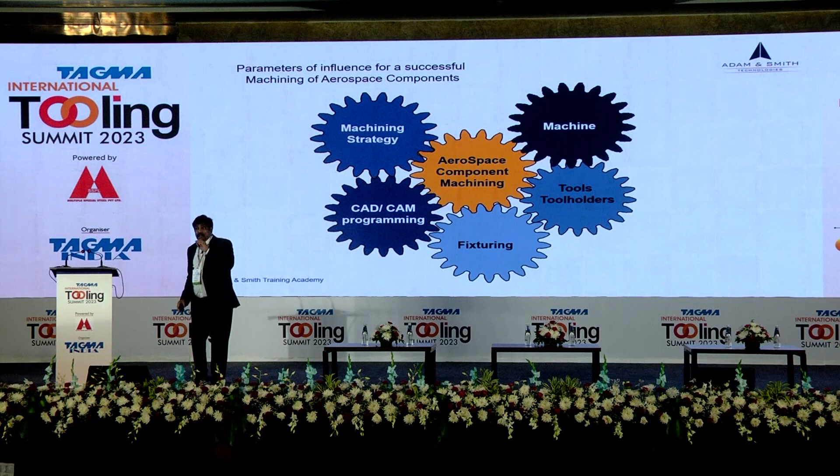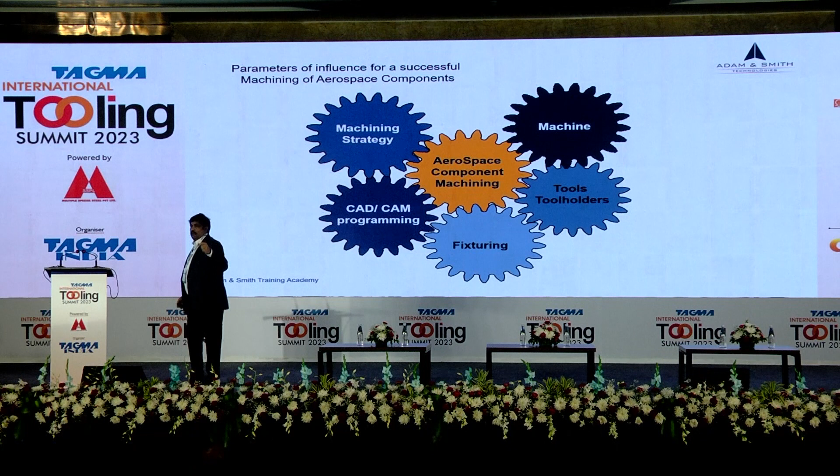They love machining, they love the job - only then is it achievable. It's not just for a monthly salary, finish and run away, no. Every engineer in this country, for the next 10 years, who is involved in machining has to take the bus, as we say in India. We have to work at it, find out the solution until we reach the expected result.

So how do we overcome this? Oh madam, 5 or 50 minutes? Okay, I told this person before calling me, when I start this subject - aerospace, flight can fly - my presentation must be slow, correct.

So I'm telling you, the main components - no need to worry, all machining. Major components in aerospace: fuselage, you can see it's a structure, this is the main structure. The structure is made of aluminum, and the binding cross-section is made of titanium. The outside structure is carbon fiber - nowadays it's carbon fiber, before it was aluminum sheets.

Because now everywhere it's lighter, thinner - 10 or 20 different assembly parts made into single parts. This is a challenge, we don't want to waste time on assembly. Multiple components and assembly waste time and lose accuracy. So the concept now in aerospace - just like people talking about Giga and Mega, Tesla making one single complete car by die casting - but aerospace is different.

Unfortunately in aerospace, for any component, no casting, no EDM, no wire cut, no polishing, no manual polishing. Please understand - no wire cut, no EDM, no manual polishing, no die casting. Everything is taken from the solid block, everything from the solid block. They don't allow it - that's the challenge.

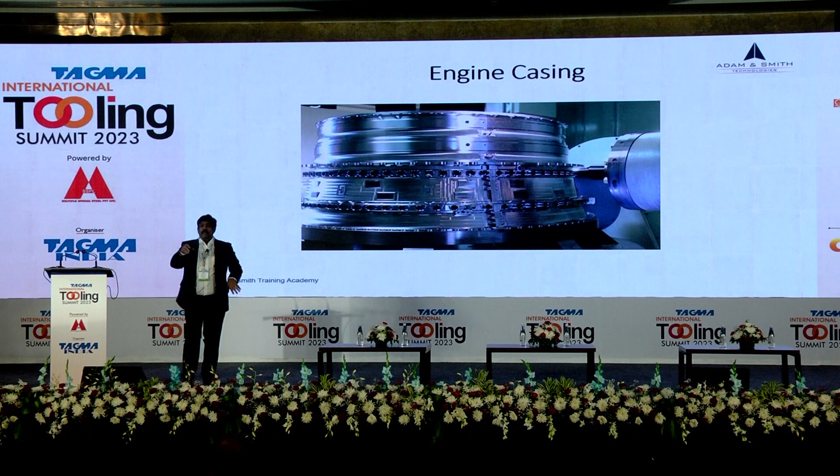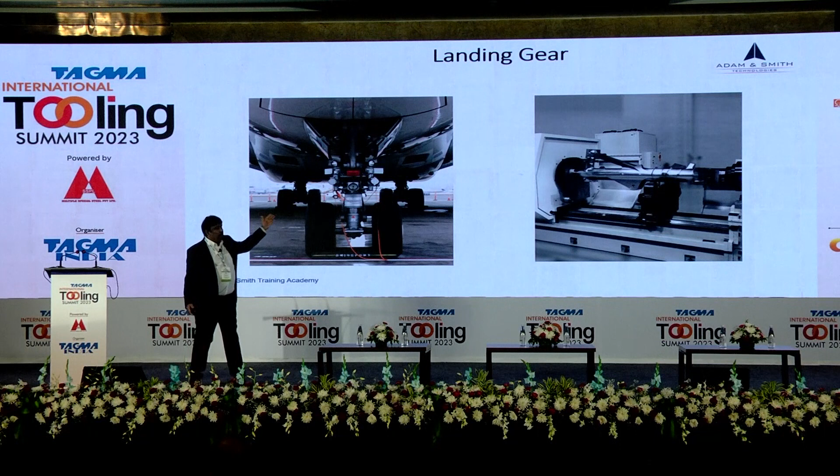Okay, next is landing gear. Fuselage, engine, landing gear - this is important. You know how many tons? 100 ton or 200 ton? From 800 kilometer speed, when landing, for a safe landing, all made of titanium. This is very, very important - made by milling and turning, landing gears completely made of titanium.

Okay, next, jet engine - the front is the turbine. You know, it's a complete jet engine. It's the heart and brain, it's the power.

This is very important, you know why? It's completely... impellers. The big impellers, they make single blades and insert almost 20 rows. This is the housing - they make a single blade and insert it.

When a flight takes off from the Middle East, you know how much the temperature is? 46 degrees, sometimes 52 degree temperature, 50 above. After takeoff, within less than 5 minutes, they reach minus 30 degree temperature. You know what is the variation? Within 5 minutes, plus 45 to minus 30 - a 75 degree variation.

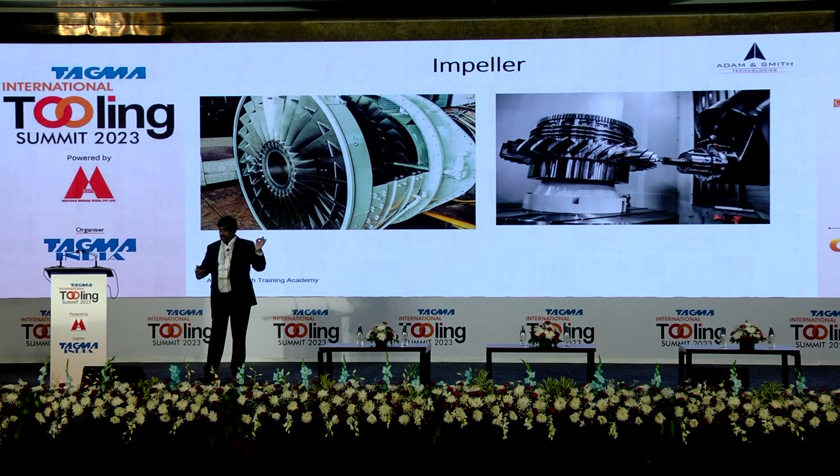That means what happened? Everybody knows we studied coefficient of linear expansion - in any solid, gas, or liquid, by heat it expands. We studied this in school, high school. Solid, liquid, gas expands when influenced by heat. But they never taught this part.

Also, when you go to minus 30 degrees, it also sinks - it shrinks. We always think of expansion, but here when I go from 50 degrees to minus 30 degree temperatures, everything starts to sink. What will happen? Everything will shut off. We cannot stop the flight in the middle of the air and repair it. Please understand, we cannot stop over there and do any repair.

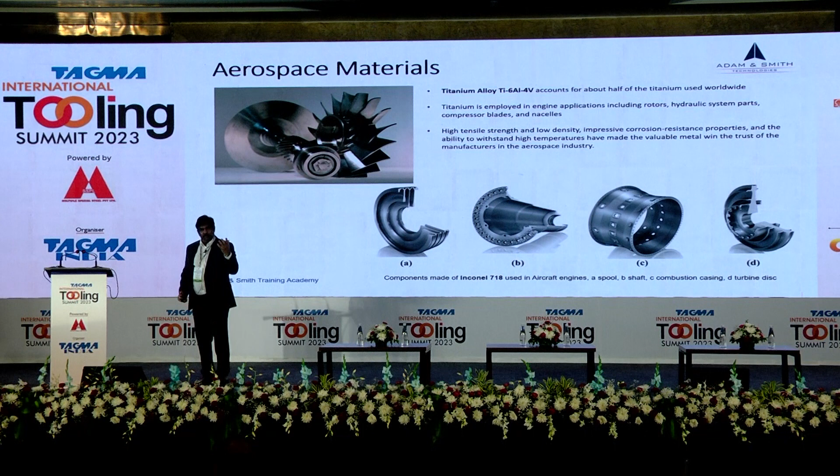That is why the tolerance, the quality - no compromise at all, more than 200%. Because 800 people, 8,000 families depend on it. Please understand, no second thoughts allowed.

More than 200%. On our side, I have seen in the workshop many times - my operator comes and says, sir, 10 micron oversize. Then the supervisor checks the job 10 times and says, you made it 10 times, every time oversize - okay, next time don't do it. Sir, this kind of attitude cannot be accepted.

Even I have seen this - I worked with the Japanese, I worked for Makino almost 10 years in Singapore as a technical application manager. I learned from them - at the operator level, the tolerance is plus minus 5 micron. Even if the operator knows it's already exceeded by 3 micron, they don't bring the job to the supervisor. They go to the grinding machine, grind it, and throw it into the dustbin.

Please understand, this is a culture - a machining culture. That means anything not exactly as per the drawing, please don't even show it to the supervisor, because our supervisor has to answer to the boss. So if he checks it 10 times, surely he will say okay. Please, this kind of attitude is not possible.

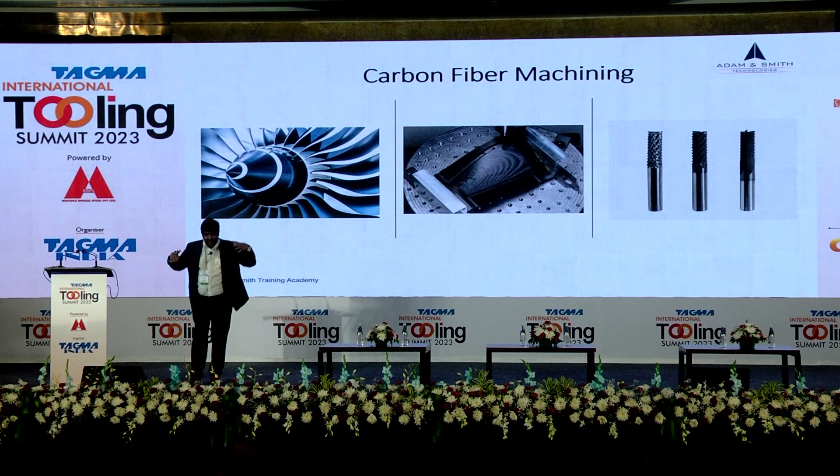Second, carbon fiber machining - in the front, the big fan is made of carbon fiber because carbon fiber has lower weight but higher strength. It can run at more than 20,000 RPM. So the concept is lighter, thinner, compact. These are all the major parts.

So I will show you one example. I'm telling you honestly, you don't need to worry. Do some exercises before you enter the aerospace industry. I will give you some job - invest money, just invest money. Whenever you're free, call your operator, call your programmer and say, do this. If you are capable, think about getting a certification, then later go and check the job.

See, this is one example - this is under the wing, we call it the flap track beam. Before, it was 125 different parts assembled together. Today it's one single piece, almost 2.5 meters by half a meter. I'm telling you, it's thinner, deeper, longer, and you see it's made from a solid block.

85% of the material - most of the time 90% - is removed. Luckily this time only 85% was removed. I'm telling you honestly, but I have seen our cutting tool people...

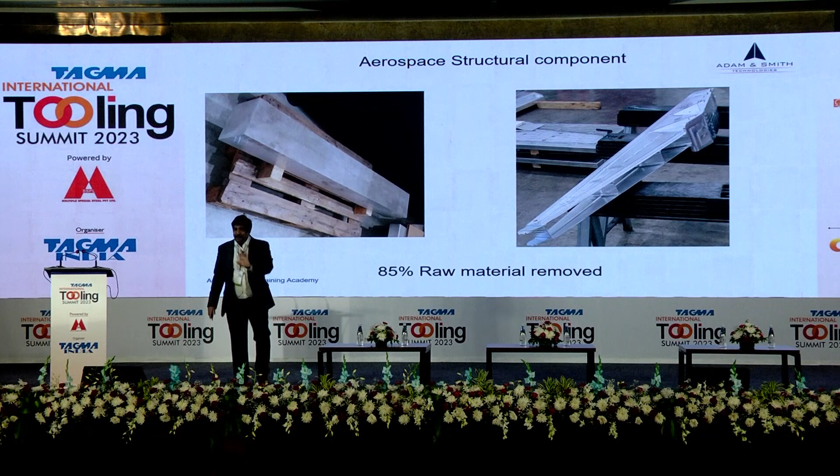So please understand, this is the difficulty. Any component you machine, think of distortion, think of stress. You cannot put it into the oven to stress relieve it, it will burn. You cannot do any stress relieving.

So, is there a video? Boss, where is the video, boss? These guys are also interested in my presentation. Okay, I'll show you what kind of machine.

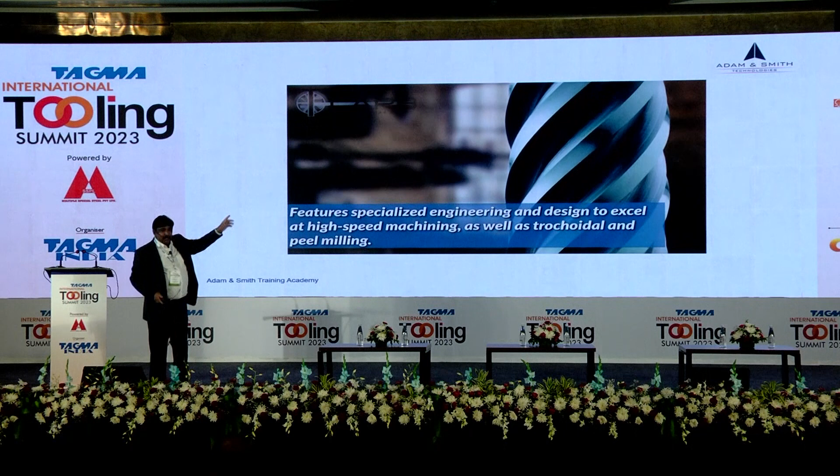Why do I show this one? Because, sorry guys, tooling guys, I picked up one video this morning after I left yesterday at 11 o'clock because of some guys. So I picked up this video. It's not for any promotion or something.

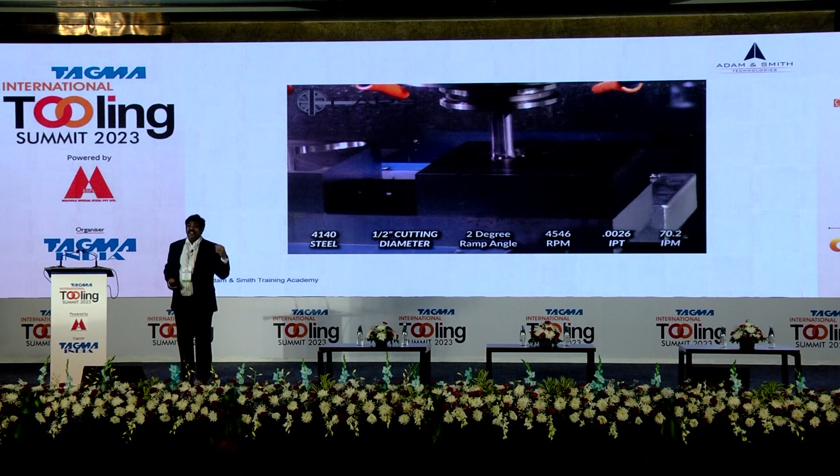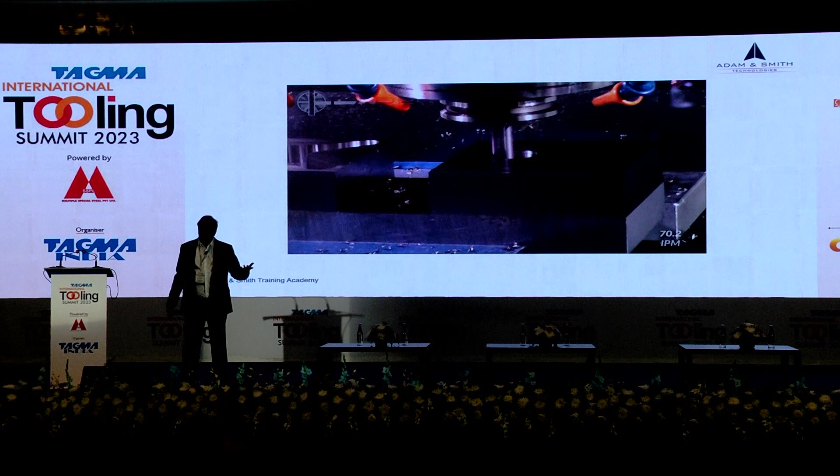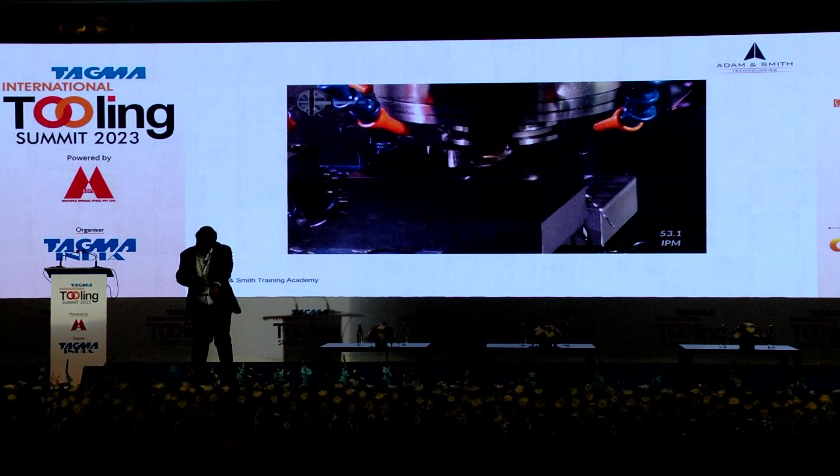You see, the selection of cutting tool and selection of machine tool is very important. Why do I show this? Selection of cutting tool, selection of machine tool in order to do the job. What kind of job? You can see. This is trochoidal machining. Please. When it went inside, all the chips are inside.

Stop, sir. You see, I know trochoidal machining for the last 15 years. High MRR, metal removal rate is higher. 6 flute cutter, I can run through the material. But if I use the vertical machining center, because of the gravity, all the chips go inside and get stuck, and the machined chips again and again engage with the cutting tool, damage the tool, it's gone. So when you do this job, you have to choose not only what kind of tool, but what kind of machine tool.

Please, sir, next video. Ma'am, this is important, ma'am. All the way I come from Singapore. I told these guys, too expensive. Yes. No, not this video. The next video. Boss. Yes, next video. Podunga.

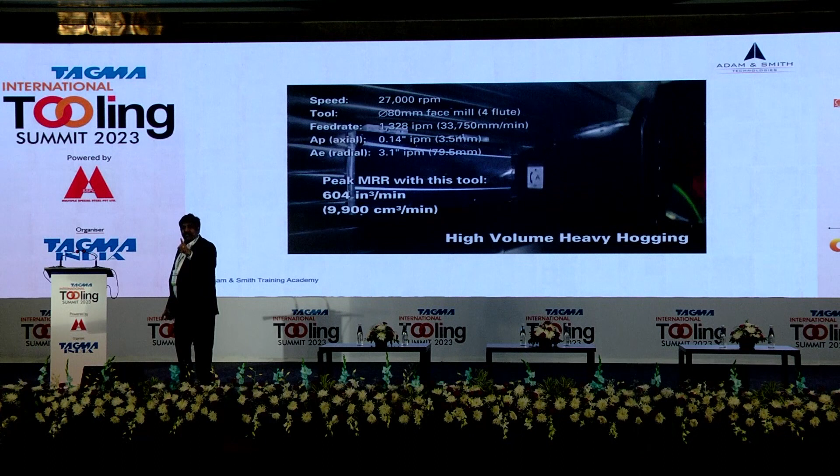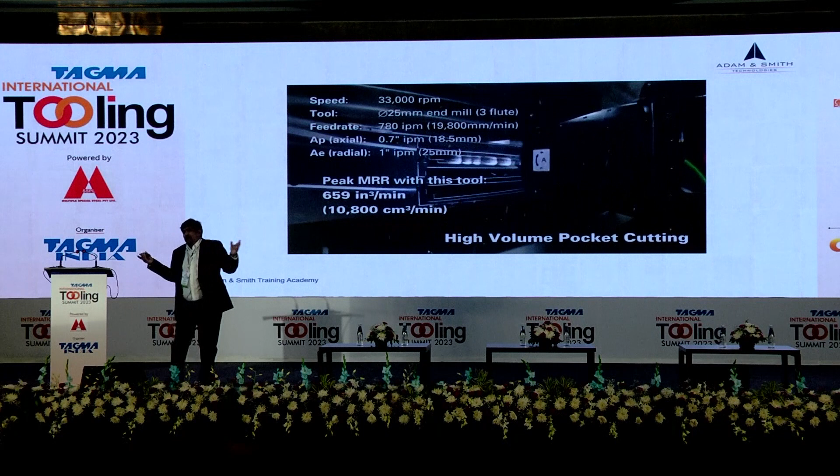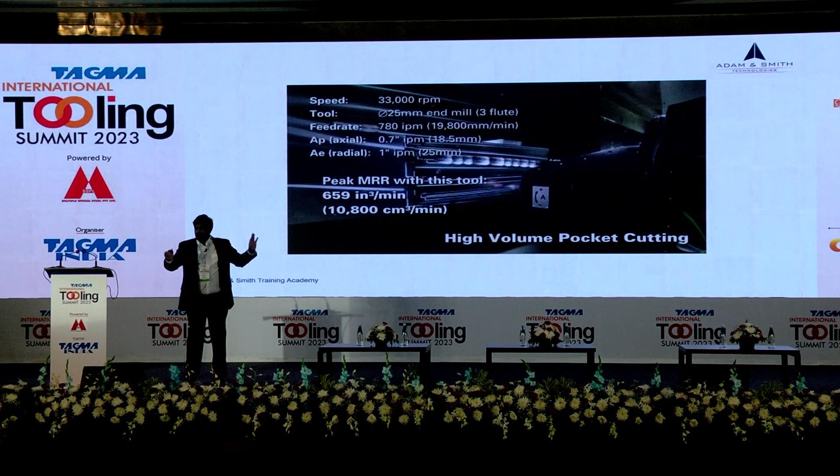174 HP cutting. No stress. Why? Same concept, trochoidal. No heat, no stress, no bending, because no chip accumulates inside the workpiece. Sir, next. Okay. So it's very important when everybody buys one VMC.

Sir, I want to do aircraft job, aerospace job. So I told them, the jobs I have shown are all the major aircraft jobs. Don't think of impeller. Everybody shows impeller. I'm telling you honestly, you won't get the impeller. Any 5-axis people selling machines, tell them very clearly, don't cut impeller, because Americans don't send impellers here. The easiest job on a 5-axis is impeller. But only we see it dancing like Prabhudeva. That's all. Impeller, forget it.

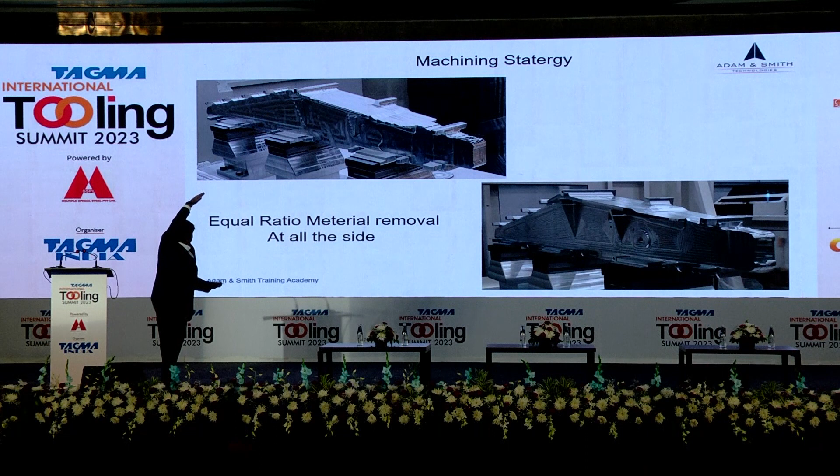But try to do multi-side machining. You can see the job as a single block. Just now I showed the multi-side machining, clamping only 5 millimeter, but the height is 400 millimeter, the length is 2.5, clamping only 5 millimeter. That means the selection of the fixture: what kind of fixture holding 5 millimeter can carry 174 horsepower of cutting without distortion?

That is important. You can see this job, but I do roughing. I haven't completed one side. I take one cut here, one cut top, one cut side. Little by little I attack all sides, so that the distortion won't come. Most people open, put the cutter, make it thin, and the other side vibrates. Then they get a bow. Why I show you this: no distortion, high metal removal, attacking from all sides subsequently, not completing one side, little by little.

Also, not 5 millimeter on all sides. For example, this side 200 mm depth, but on top only 50 mm. I don't cut 5 mm here, 5 mm here. No. I use ratio cutting. If it's 200 mm, I cut 10 millimeter. Over there, I cut 1 millimeter. So that I keep the wall thickness even.

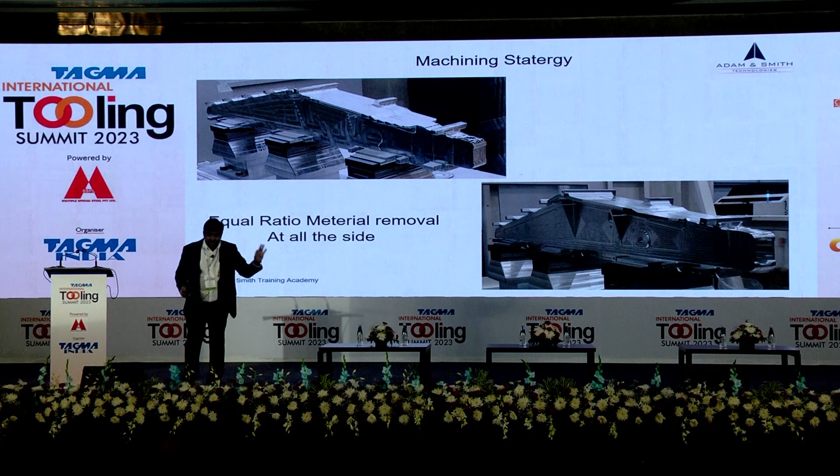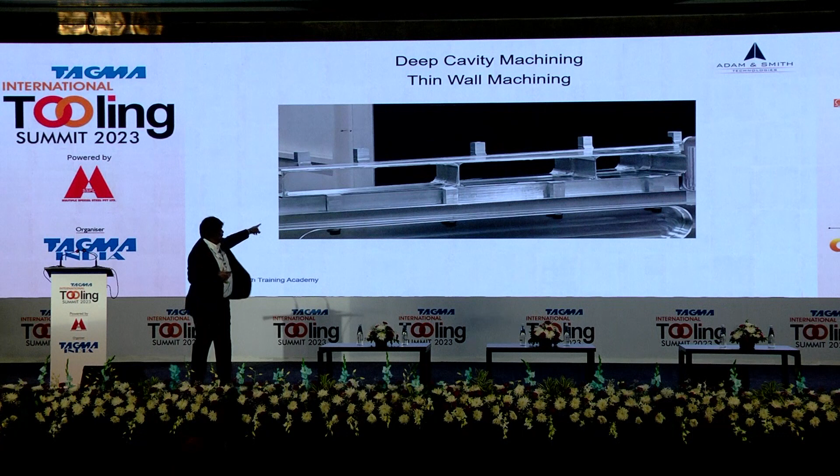Okay, you can see this. It's almost 320 millimeter deep, but the corner radius is 10 mm. You know that I cannot use more than a 20 dia cutter. But I use a 20 dia cutter with 300 length, L by D ratio close to 15 times. Okay. What is important?

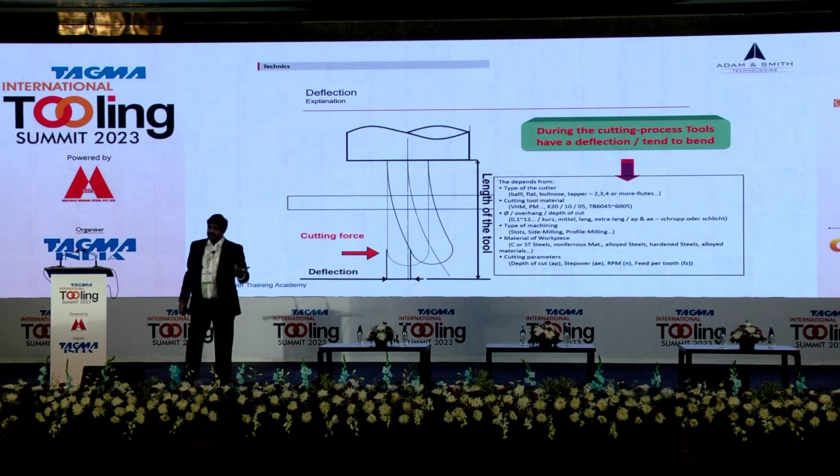Before I take the long cutter, I know, because we studied physics, deflection. Any longer tool will deflect. When the cutting force acts, it deflects more. Pushing the material, deflecting, vibration, chattering, everything. You have to understand the deflection first, because your L by D ratio is bigger. If it's shorter, you can see this. This is the formula: how to work it out, how to minimize, split it into 3 times, 5 times, 10 times, 20 times, same diameter, different length, attacking.

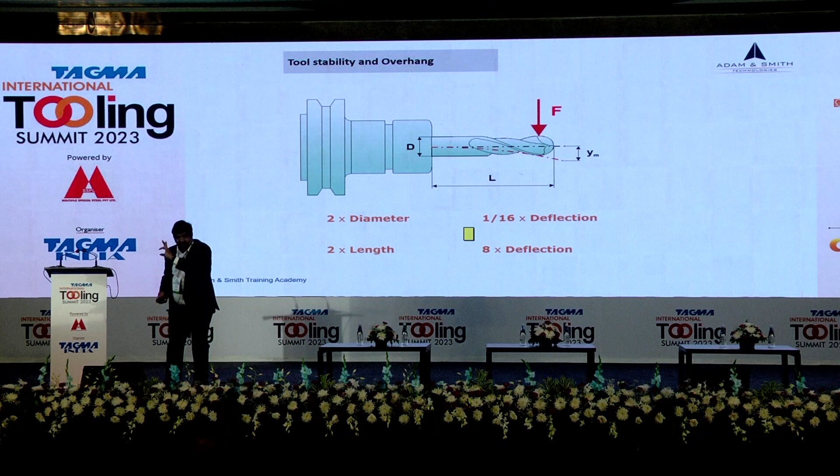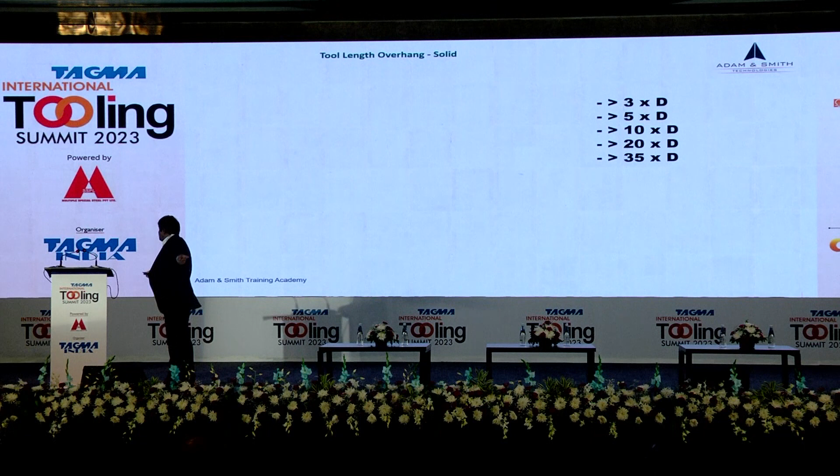Time up. Ma'am, till 2. I will rush, ma'am, please. For you, it's a different subject. You guys want to go home. But this is important. Last 2 days, these guys spent a lot of money. Okay, boss, finish. Okay.

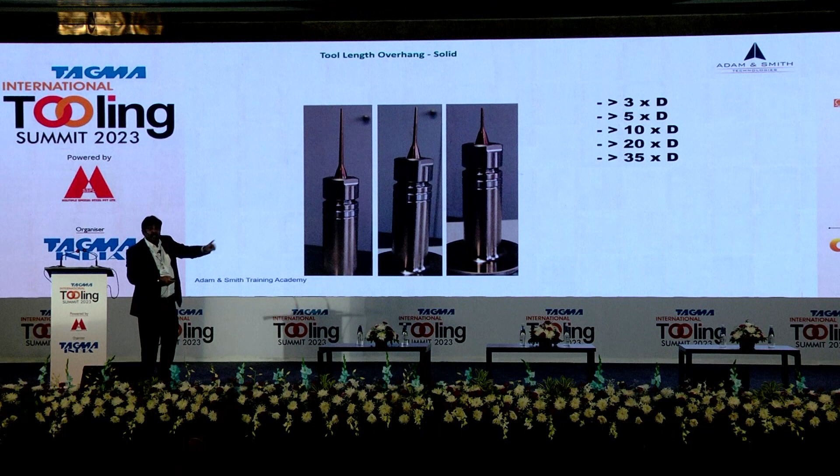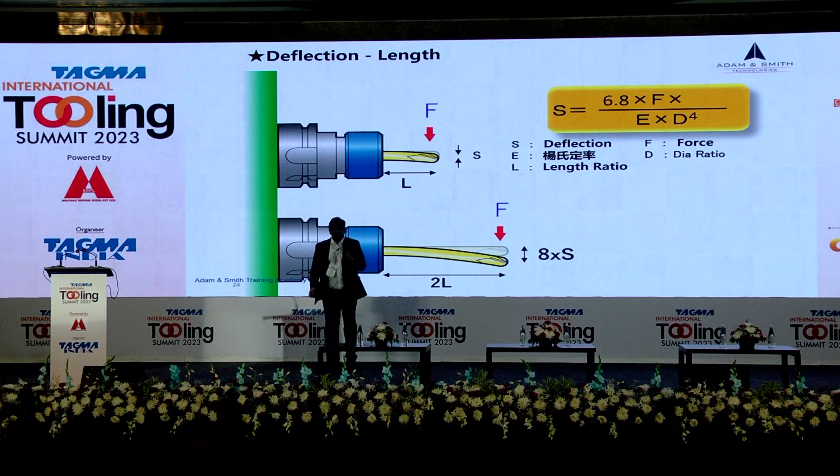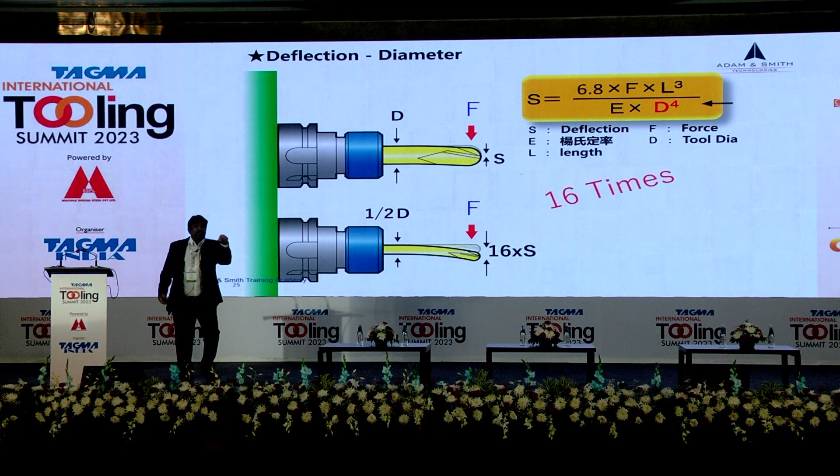Sir, you can see this. Same diameter, different length. I use for one pocket opening, 2 different. Just for this, boss, I move a little bit faster. This time, how many times the deflection? Diameter same, but 2 times the length, it deflects 8 times. Please understand. This is a scientific, a mathematics formula. If the length is same, diameter is half, 16 times deflection. So you have to understand this when you're using long tools.

Madam, another 2 minutes is there, ma'am.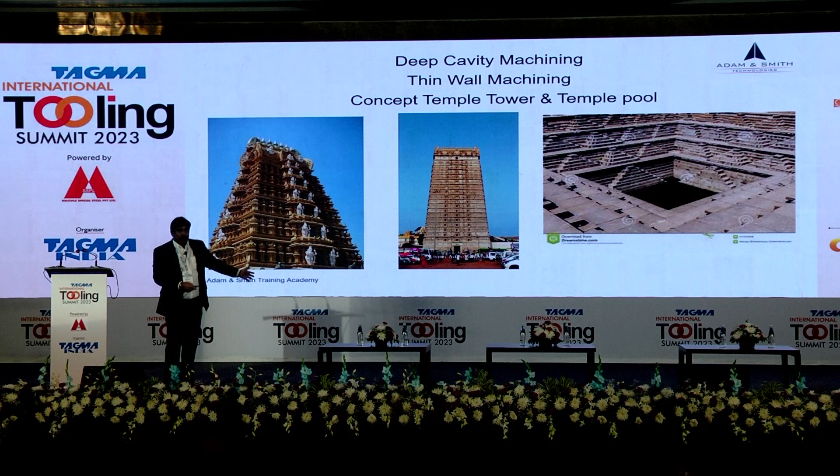Temple pool. When you have a deep cavity, when you have a slim wall, cut like a temple tower. The bottom is a support, slowly, then it won't vibrate. It won't vibrate during roughing. Even if your model is straight, you have to create a model like a temple tower. Okay, same cavity is a temple pool. So tool deflection I explained.

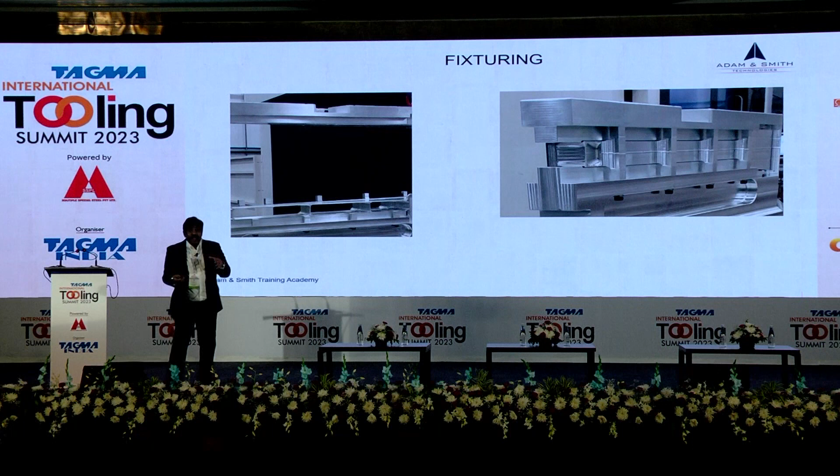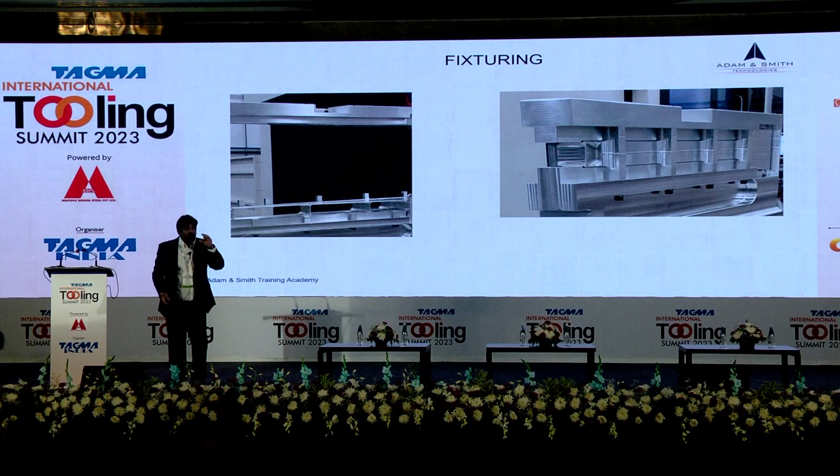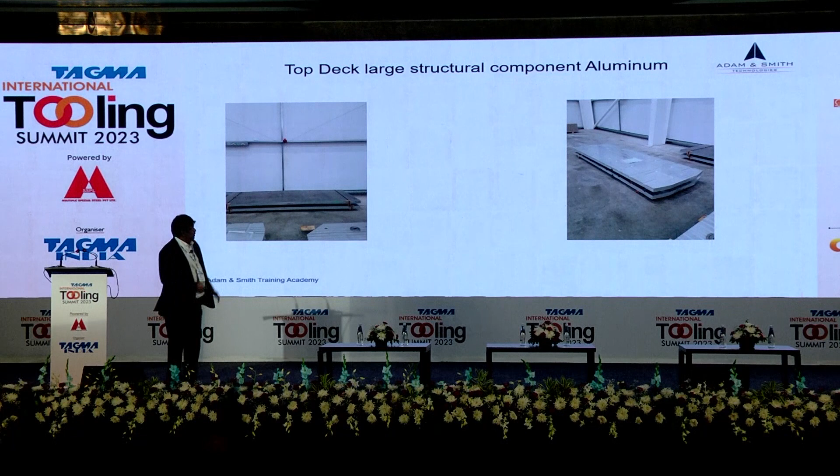Then the fixture. After I open up the pocket, I need a support. You see the bottom support? This is the component. Bottom clamping, top clamping, not only mechanical, also vacuum clamping. Then how to measure? This is the measurement, like air, no clamping force, because the flatness is less than 0.2 millimeter. Jobs like this are aircraft top deck, bottom deck. Aluminum machining. From a solid block, just clamping, we cut, keep some material, after finishing, only the holding.

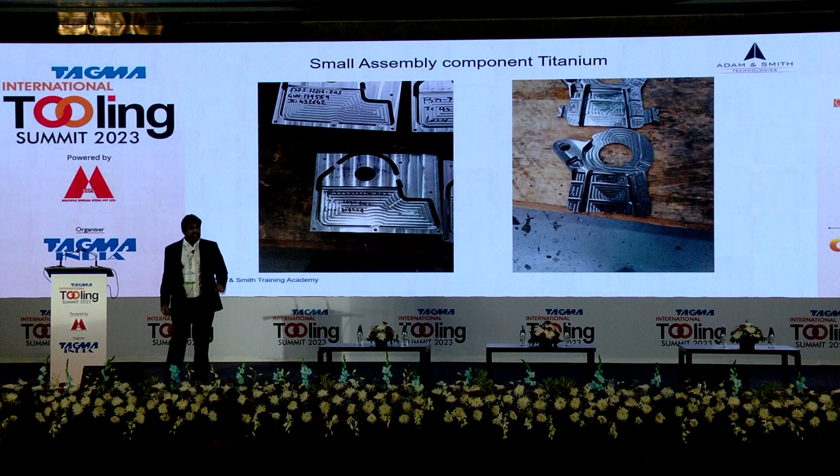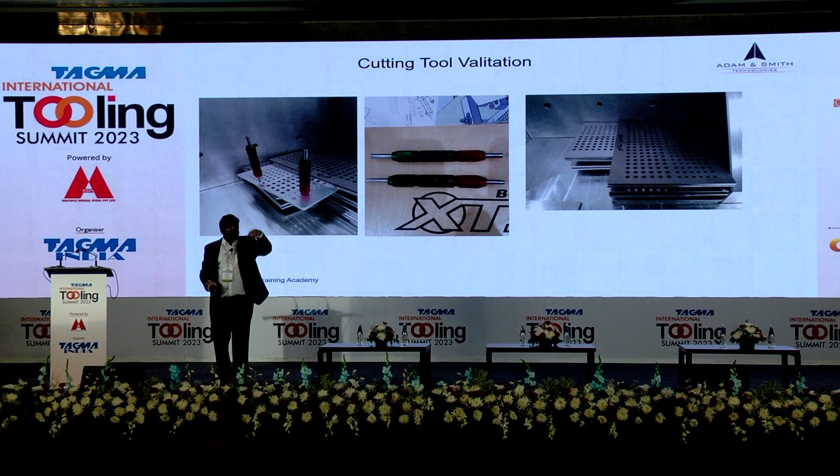Okay, in aerospace component machining, whatever tool or drill you use, you must test the tool to find out how much accuracy we can get. This is called tool validation. You cannot just take any tool and use it, not possible. You can see, I use just drilling and reaming. I spent more than 5 days, more than 50 plates, taking the tool, cutting and trying. I found out the complete father, mother history of the tool. Whole history of the tool.

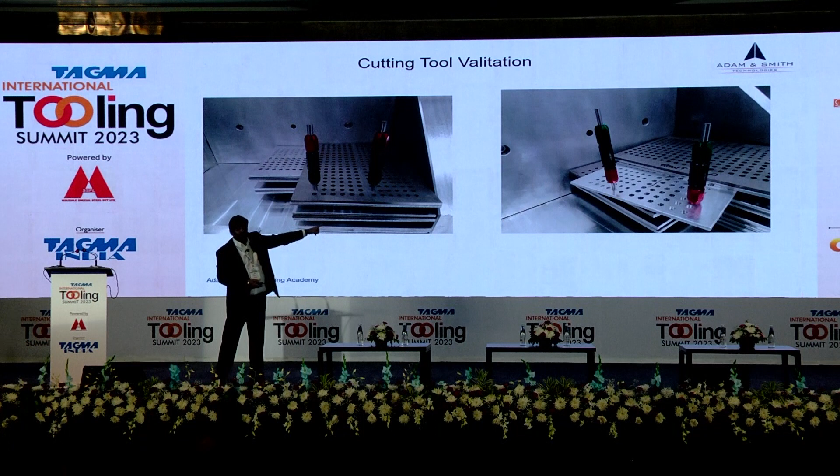So you can see, go. Okay, over here, no-go entered. That means this is titanium material, that is aluminum material, same tool, but here, go is fine, no-go, so rejected. So validation like this is important.

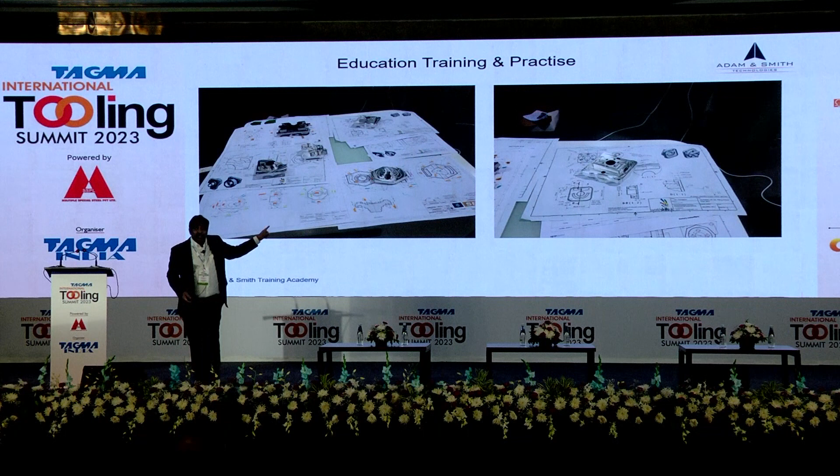Next, in all these aerospace industries, you guys need training. For your information, I was a trainer for the World Skills competition. For CNC machining, there is a competition in the world, like the Olympics every 4 years. They call it the machining Olympics. Once every 2 years, Tokyo, London, Germany, I was the trainer. You can see, this kind of component. I train my engineers. When they join me, I give this exercise, only the drawing, and they do complete machining. These are all components for World Skills. So all the time I travel and give training.

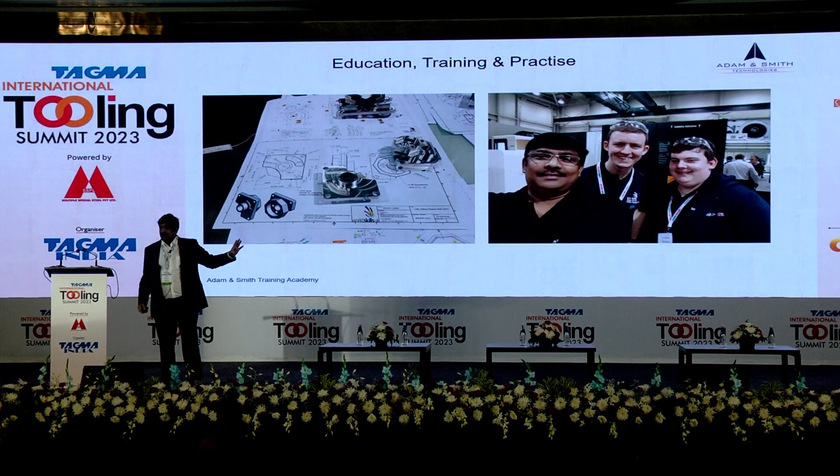These 2 students, when I was in the United Kingdom, I was appointed to train them to compete in the World Skills competition. I trained these 2 guys for 3 months. They won the silver medal. This is where training is important. See, this is the World Skills training. Without training, nothing can happen in aerospace. So next, all these things I'm doing.